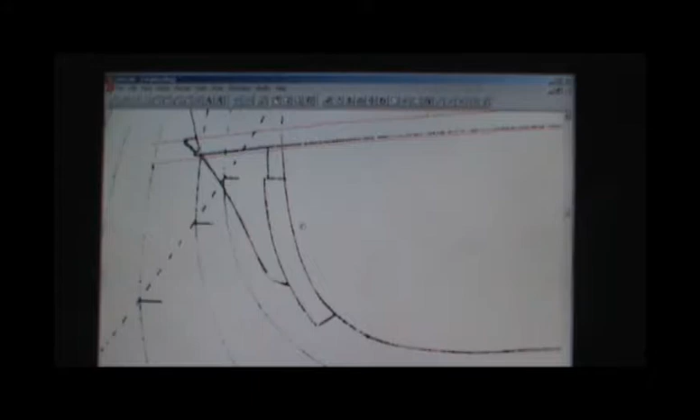Okay, I'm back. So I add a couple more lines here, right at the top of this, and another one down here, snapping to this curved line. See, I'm just extending these way past that line. Let me see, got one more right here.

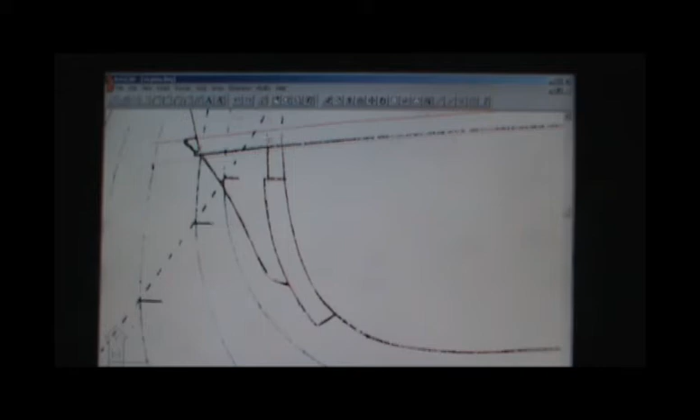Okay, let's go back and trim these. And let's trim this one. Okay, now we can zoom out and let's see what we got.

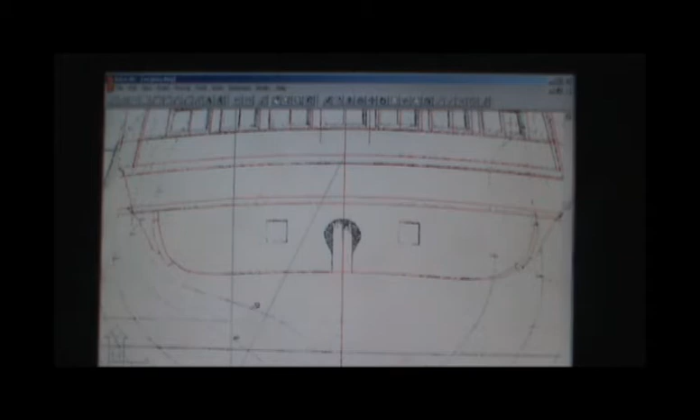So now we want to put the bottom of that quarter gallery on this side. We're going to mirror everything we've got here, and this time we can mirror it right from the intersection here. Use ortho and bring it down.

There we go. You see how bad this side looks? Everything is so far off because this drawing is so far off. Alright, let's zoom out. It's starting to take shape now.

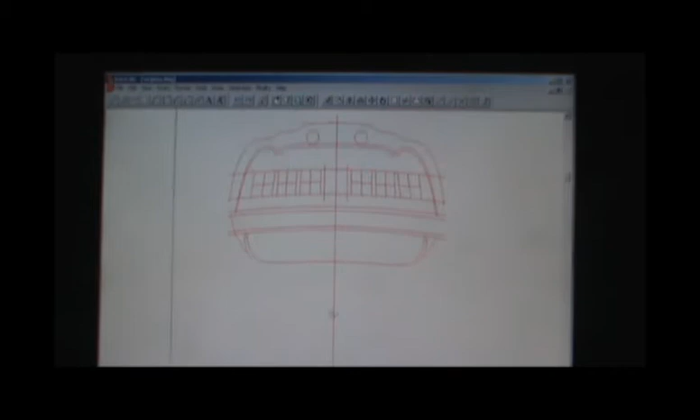Next thing we're going to want to do is put in the body plan down below. Okay, so we'll stop here.

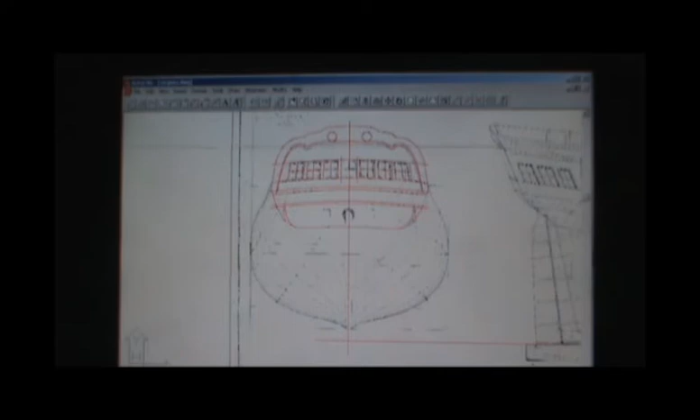Okay, the next step is to draw this body plan down here, but let me show you something. There's a whole bunch of lines up in here. You see all these little dotted lines? Well, that's really the hull that's behind this stern here.

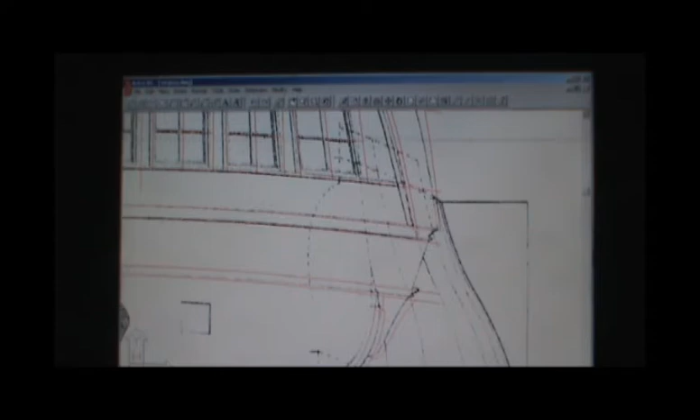Let me show you on the other side. You see all these little dotted lines? Here's one here, here's another one here. This is the height of the forecastle. And this is all behind this stern drawing we just did.

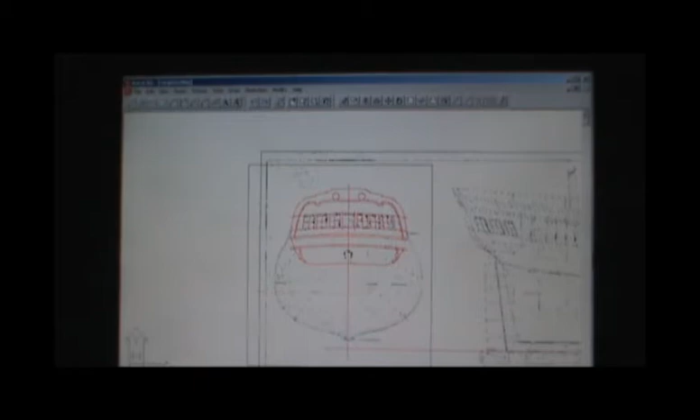So, to simplify matters, what we're going to do is I'm going to take this and copy what I've drawn, and I'm going to move it off to the side. See what I've done?

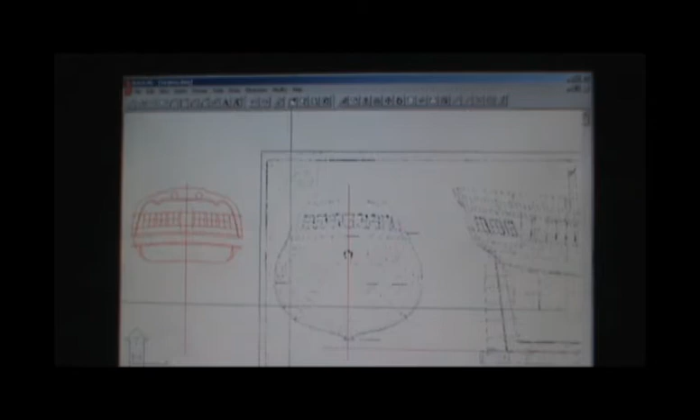This is the stern drawing we're working on. And then I'm going to take it and erase it off of here. Just like that. Now I'll be able to draw the body lines here without getting them all tangled up with those other lines we've drawn.

So we're going to start with the midship frame, and that's this big, wide, thick one right here. So again, I'm going to use my spline. I'm going to start my spline here. Get rid of ortho. We have a really nice hollow right down here at the keel, so I'm going to make these kind of close, like this.

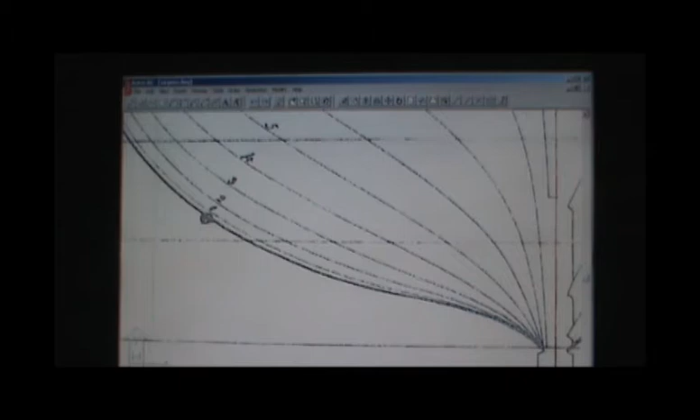Okay, so as it gets... there we go. Keeping this curve kind of tight here.

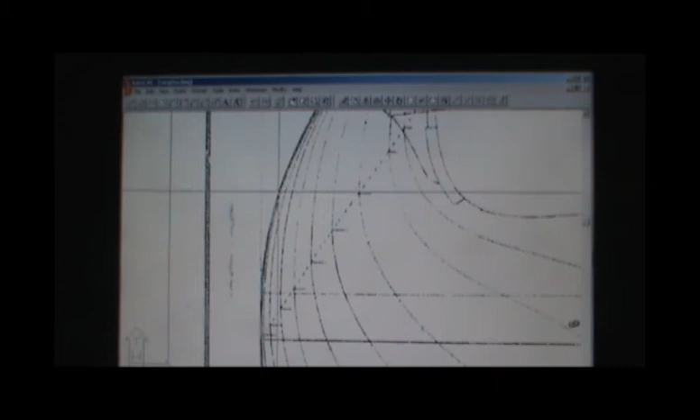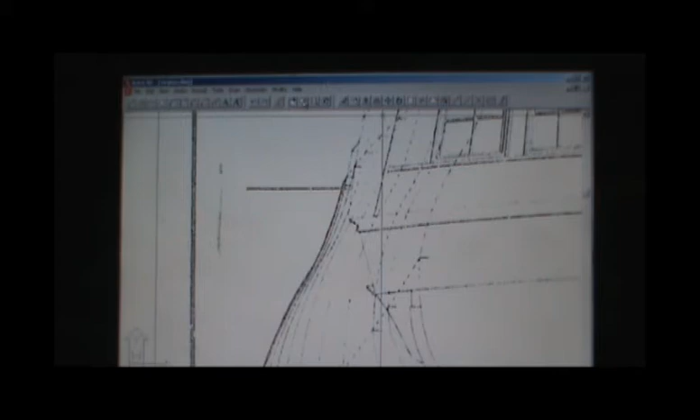Now let's go up the big tumble home. This is a really nice shaped hull. Look at that nice tumble home there. This is going to make a very pretty hull. So I'll tighten up my points, and I'm going to stop right there and end it. Now it's going to be interesting to see how that matches the other side.

See it? Let me zoom out a little bit, then I'll pan. Okay, that's my midship body line right there. Now I'm going to take that and mirror it. Select it, snap to the end of my center, put ortho on and bring it up.

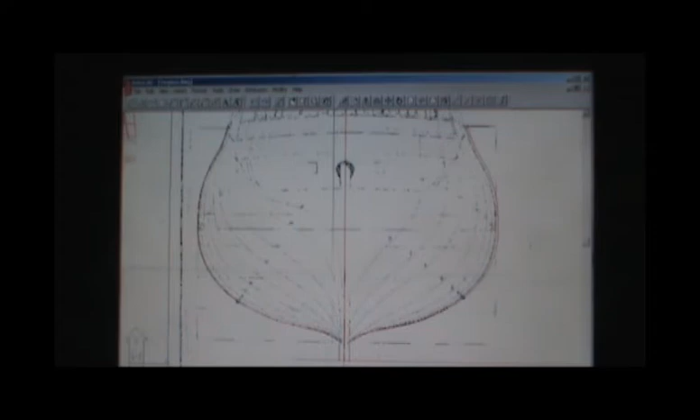Down here it's pretty close, but as you can see it's getting wider. That gap is getting bigger and bigger. So the whole hull is really out of whack.

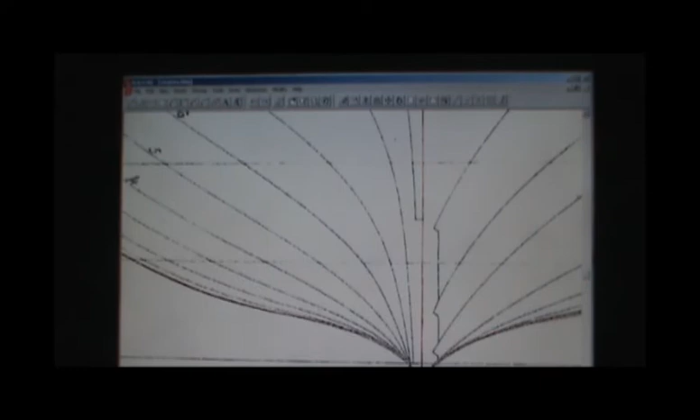When you mirror it, see it's on this side. I'm following that line really close, right on here. Okay, but on this side, when I mirrored it, it's this far off. So we're going to keep the mirrored image of our midship on there.

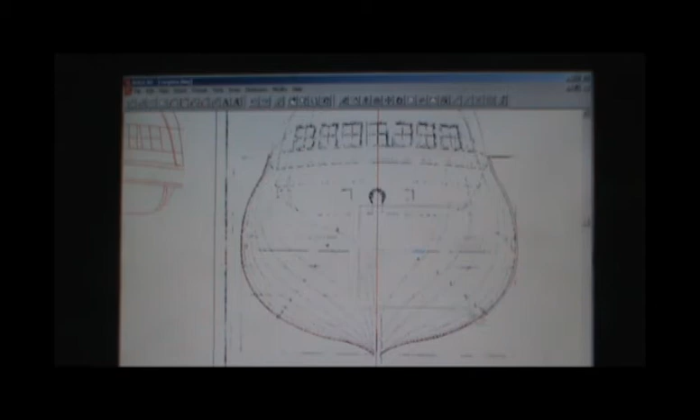So that's how you draw them, really. And I don't think it would be necessary to sit here and go through every single body line, except we'll just do the bow one here, because that's a very nice curved line.

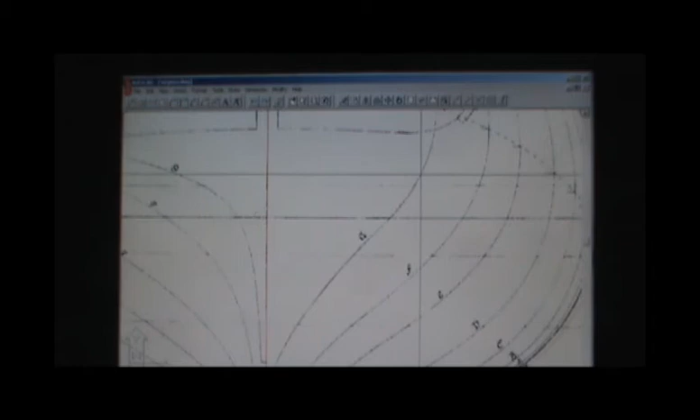Okay, we're going to start here. Get rid of ortho. Okay, we're just following this thing up with a spline. Coming up around that.

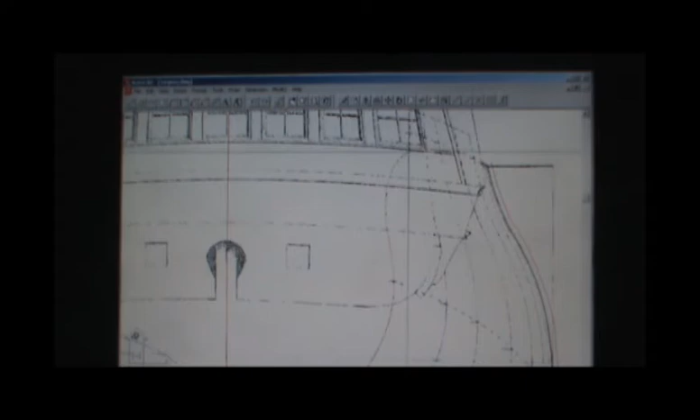And there's a real kind of serpentine curve here at the bow. Holy smokes, look at that. And end it. End. That shape there, that's the bow. Really quite a shape to that.

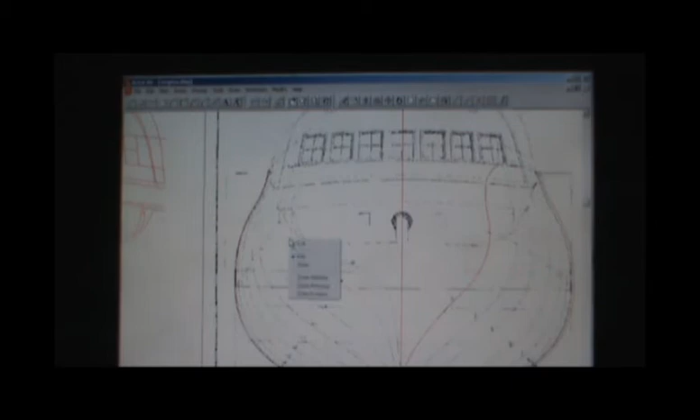Alright, we could do the stern, which is marked as number 9 right here. Let me look at it. So you don't want to lose it. See, it goes up and you could follow it.

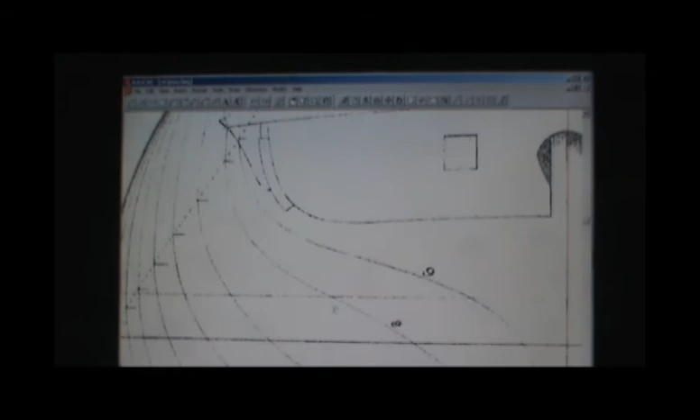And it goes all the way up here to the quarter deck. Alright, let's do number 9. Get my spline going.

Right here. See, if you make your... let's erase this.

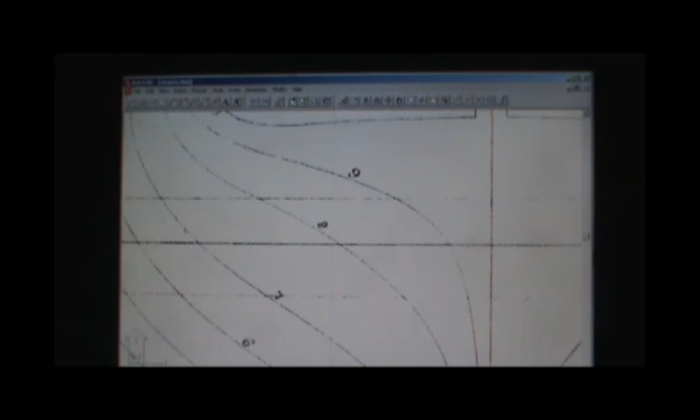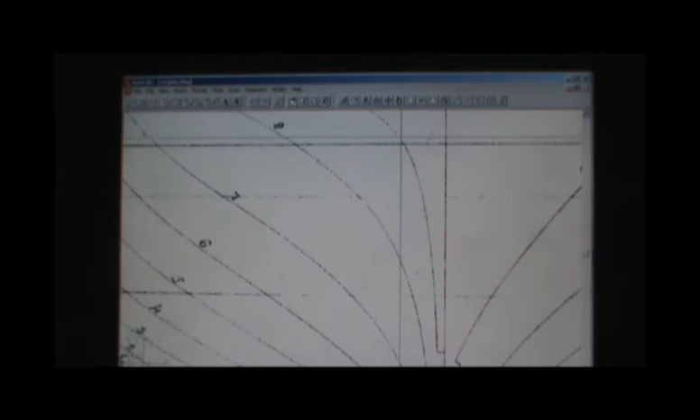Okay, let's do frame number 9. Well, actually, body line number 9. Get our spline, and here we go. Just work our way right along this line. Okay, like this. Now, when you're using your spline, if you make your points too far apart...

So let's say, for instance, I want to go all the way up to here. You see how far off that spline is? Okay, so we don't want to do that. Well, we could average it out like that, but still, I'm going to take that out of there, and then I'm going to shorten my distance here. See, that'll give me a more accurate shape.

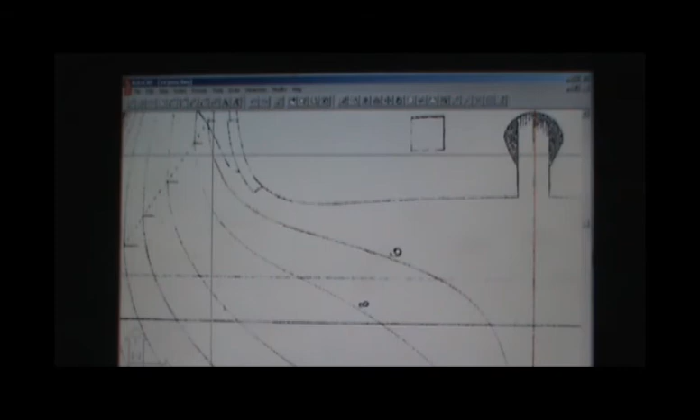Okay, there's going to be a lot of points along this line. So we may have to redo it if we use this as a laser cutting line, because there'll be too many points for the laser cutter. But to draw it, at least we can get it very close.

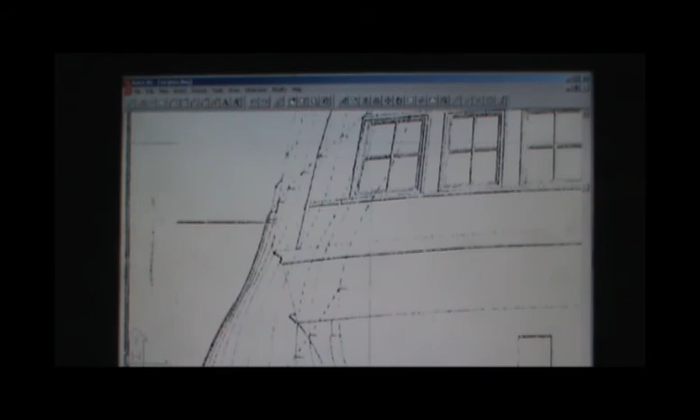See, now it gets all tangled up here with a bunch of other lines, so we have to be careful and follow it up. Okay, where is it? It's right here, and all the way up. Well, let's go right here and stop it right here. That's the quarter deck. Okay, we're gonna end it just like that.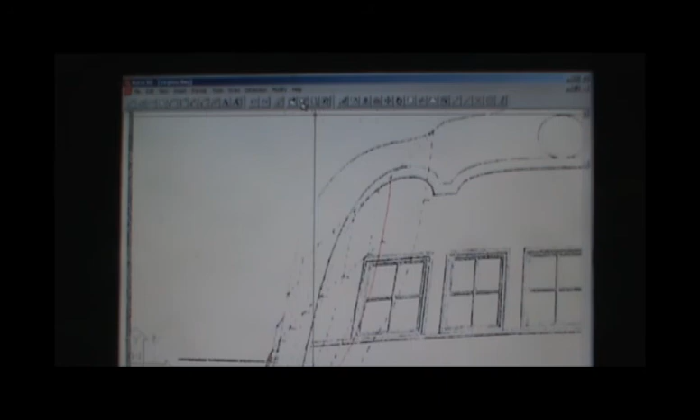So we'll zoom out, pan a little bit, and that's the shape of our hull at the stern. Very nice, very nice shape to this whole hull.

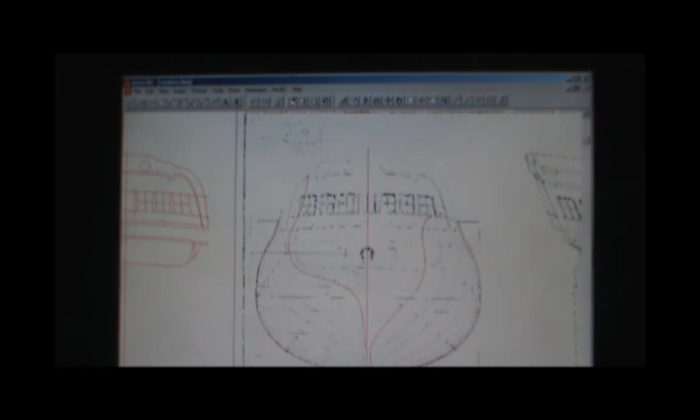So all I'm going to do now is go back and fill in. We did 9 and we did the midship, so I'm going to do 8, 7, 6, 5, 4, 3, 2, 1. And I'll do that off camera, because you don't want to sit here and watch me do that. So let me do that and then I'll come back.

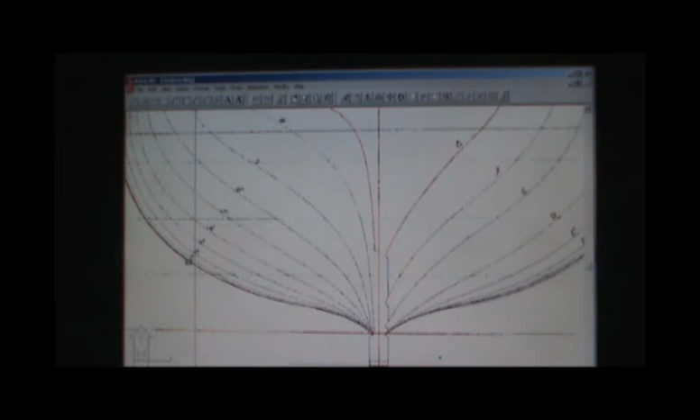Okay, before I draw all of these body lines in, just want to show you down here as I drew this line, that's the top of my rabbet. So I want all of my body lines to come all the way down to my rabbet line right here. So when I go to spline, I'm going to go to snap to intersection, and I'm going to snap right here at my rabbet.

Now let's zoom in really close. Okay, now we want to get that nice hollow down here at the keel, so we're going to do some very tight points and start bringing that body line number 1 up and around.

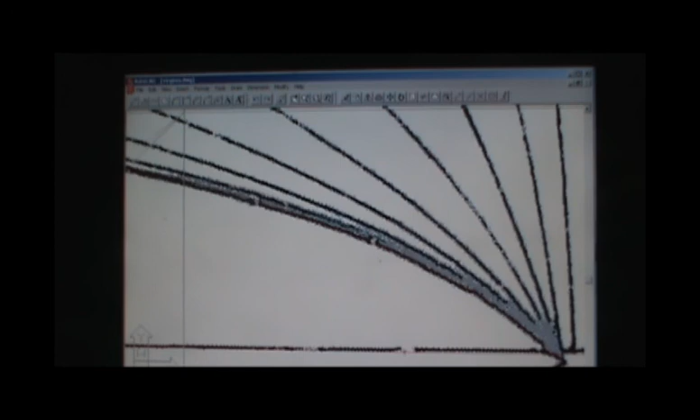Now we could zoom out and finish her off. Okay. See, once again, you don't want to have too wide of a point space between your points, because you're going to get a not an accurate curved line.

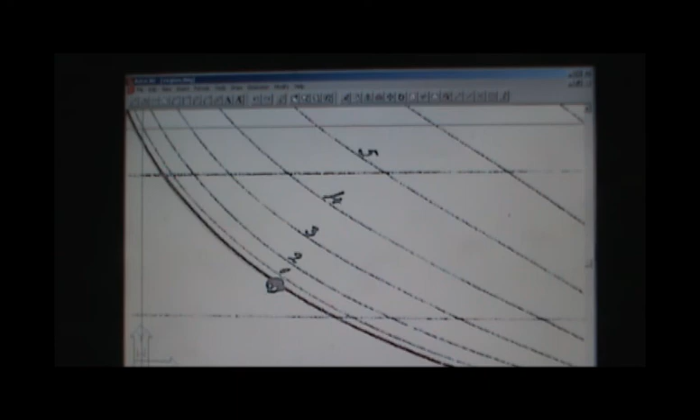So once again, keeping them things kind of tight, and just work my way all the way up. Okay, let's pan down. Okay, and bring it around.

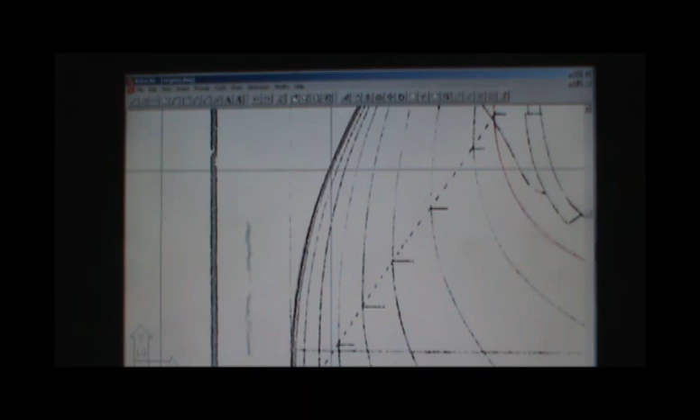See, now the hull is getting closer to the same size here. See, the line number 1 is getting tighter and tighter to the shape of the midship. So by the time it gets to the top, it's going to almost be in the same place, which it is. You see, now it's almost right on top of the midship.

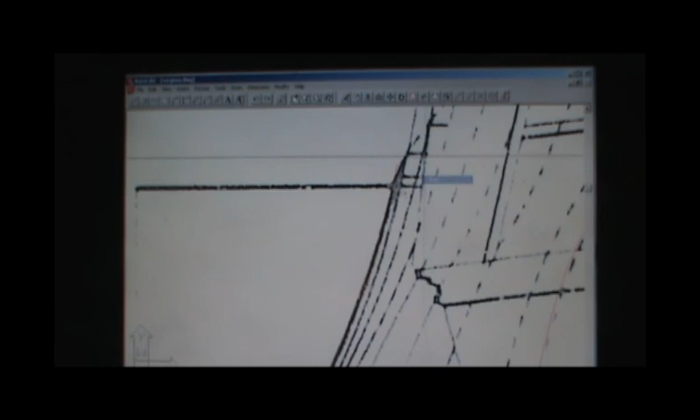So we're going to zoom in very close and we're going to put that line right alongside it. Just like, we're going to let it run over top of the hull. We'll trim it later. Okay, and end it. Now you can see how close it is. Very close.

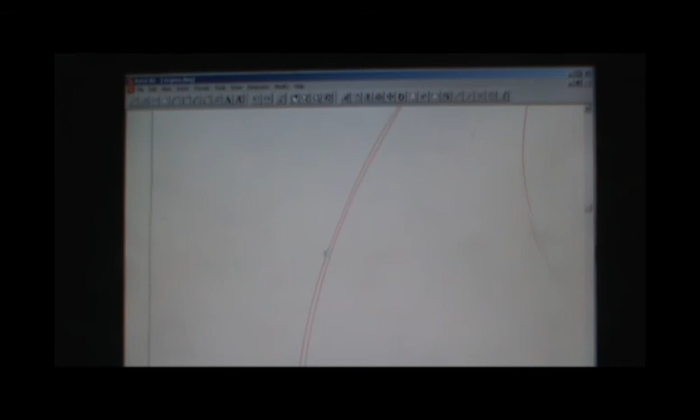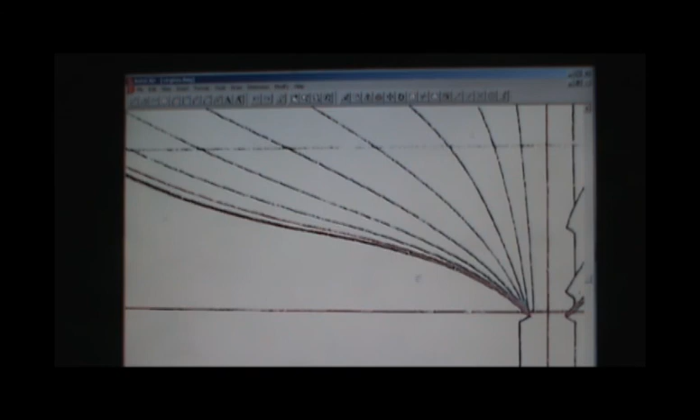As we pan down, it widens up and it gets wider here, right at the turn of the bilge, or at the top of the floor timbers. See how much wider it got? Now it's narrowing and narrowing until it almost hits the exact same point down here at the rabbet. So now I'm going to go ahead and do the rest of them.